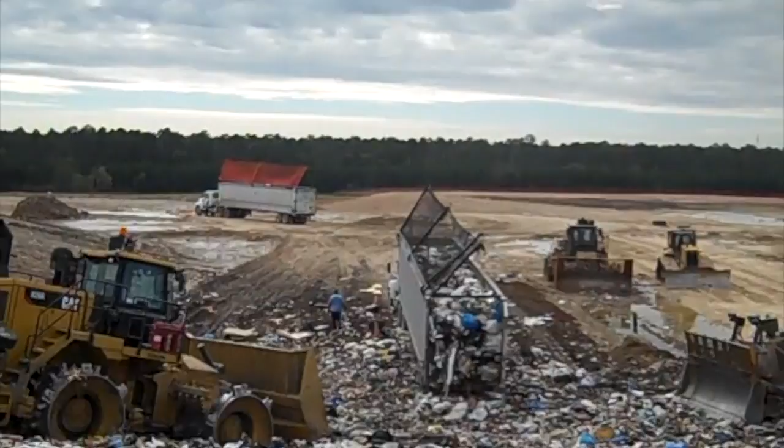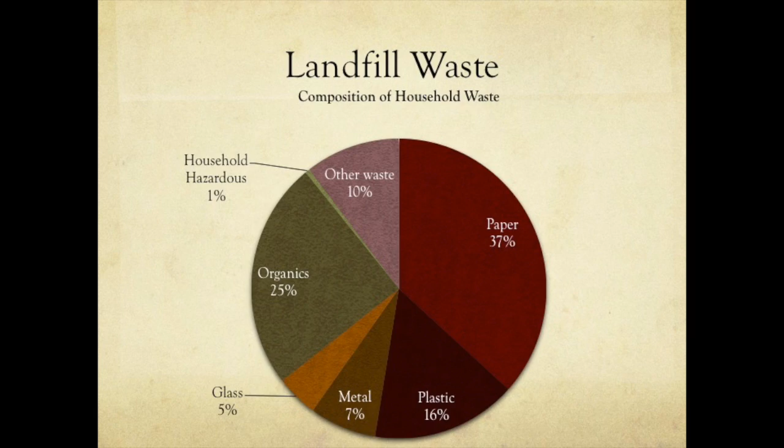A landfill is a place to dispose of waste material by burying it and covering it over with soil, especially as a method of filling in or extending usable land. Landfills typically consist of food waste, plastics, consumer goods, and packaging. Even though these items should be disposed of elsewhere, it is inevitable that electronics, appliances, yard waste, and even hazardous waste enter these municipal waste streams. These wastes emit pollutants, which require air pollution control.

Landfills are classified according to amount and types of waste received. Today, Florida has approximately 95 active Class 1, 2, and 3 landfills. Class 1 landfills receive an average of 20 tons or more of solid waste per day, and Class 2 landfills receive an average of less than 20 tons of solid waste per day. Class 1 and 2 landfills receive general, non-hazardous household, commercial, industrial, and agricultural waste.

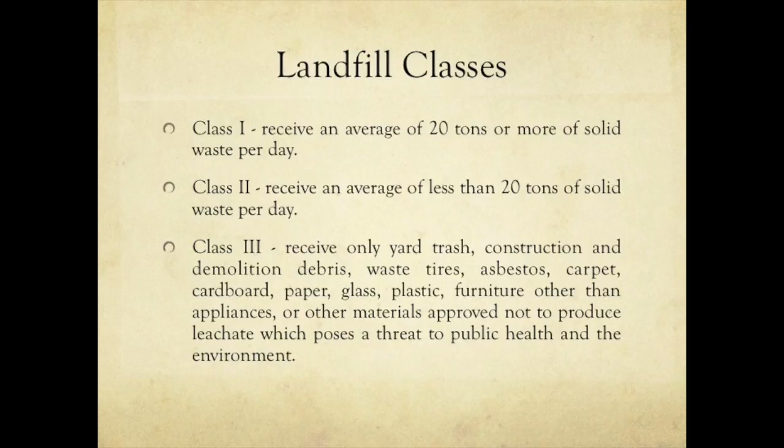Class 3 landfills are those which receive only yard trash, construction and demolition debris, waste tires, asbestos, carpet, cardboard, paper, glass, plastic, furniture other than appliances, or other materials approved not to produce leachate which poses a threat to public health and the environment. The municipal waste industry contributes to global greenhouse gases, as well as air pollutants that can cause direct harm to human health.

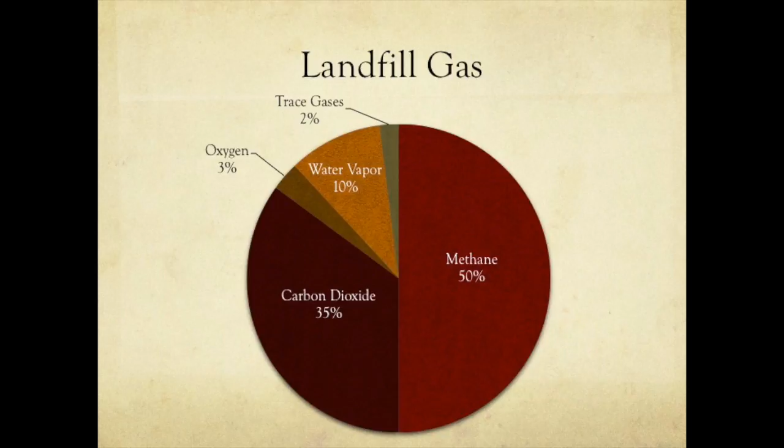A primary concern that must be addressed in the design and operation of modern sanitary landfills is the potential explosive nature of gases that are produced by decomposing solids during the landfill's life. Landfill gas is a product of solid waste decomposition by anaerobic digestion composed primarily of methane and carbon dioxide, both of which are greenhouse gases. Also present are oxygen, water vapor, and minute concentrations of trace gases such as nitrous oxide, hydrogen sulfide, carbon monoxide, VOCs, and non-methane organic compounds.

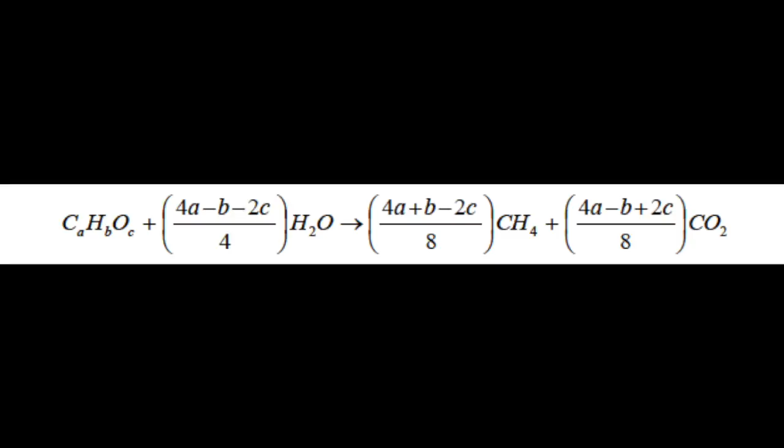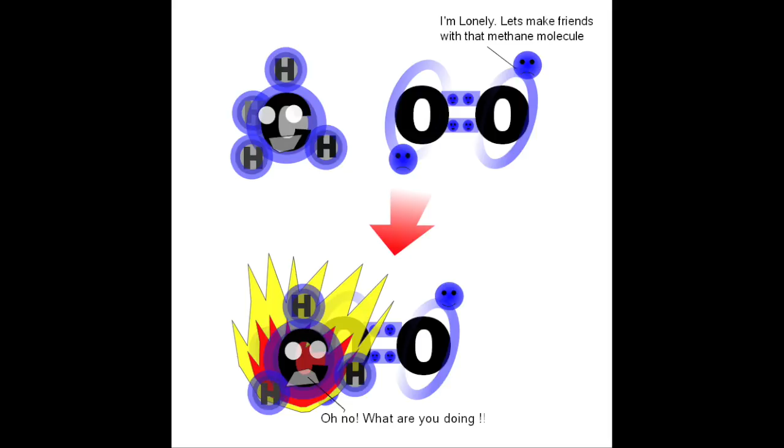The chemical formula for the anaerobic biological conversion of an organic solid waste to methane and carbon dioxide may be described as the decomposition of cellulose, resulting in a final composition of 50% methane and 50% carbon dioxide by volume. Methane is not harmful to human health, but when mixed with the appropriate amount of oxygen, it is flammable and can potentially be explosive, a characteristic many landfills take advantage of by converting landfill gas to energy.

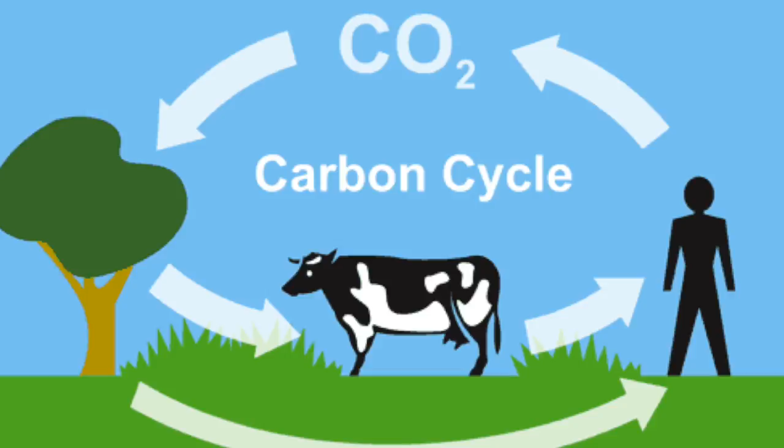Human lungs transform oxygen into carbon dioxide, which is exhaled and taken up by plants. Hydrogen sulfide at high concentrations may produce multiple health effects such as irritation to the eyes, throat, and lungs. Collecting landfill gas can improve air quality by reducing odors and emissions of pollutants such as non-methane organic compounds that can contribute to smog formation.

Our task was to assess the major air pollution problems generated from landfill gas, focusing on the means to mitigate their contributions toward global greenhouse gases, effects to human health, effects of non-renewable resources and energy costs, associated regulation, and landfill air pollution control methods of the best available and most effective technologies.

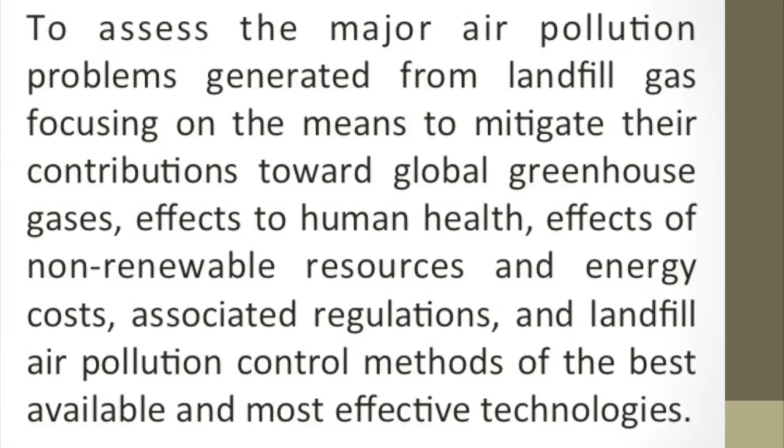Landfills and landfill gas energy projects can be subject to air quality, solid waste, and water quality regulations and permitting requirements. State and local governments typically develop their own regulations for carrying out the federal mandates. Therefore, specific requirements for construction and operating permits differ among states. It's important for project developers to review applicable requirements and regulations.

The Clean Air Act, CAA, regulates emissions of pollutants to protect the environment and public health. The CAA contains 5 provisions that may affect landfill gas energy projects. 1. New source performance standards and emission guidelines. 2. National emission standards for hazardous air pollutants, NESHAP. 3. New source review permitting. 4. Title V permitting. And 5. Information Collection Authority, which was used to implement the Greenhouse Gas Reporting Program.

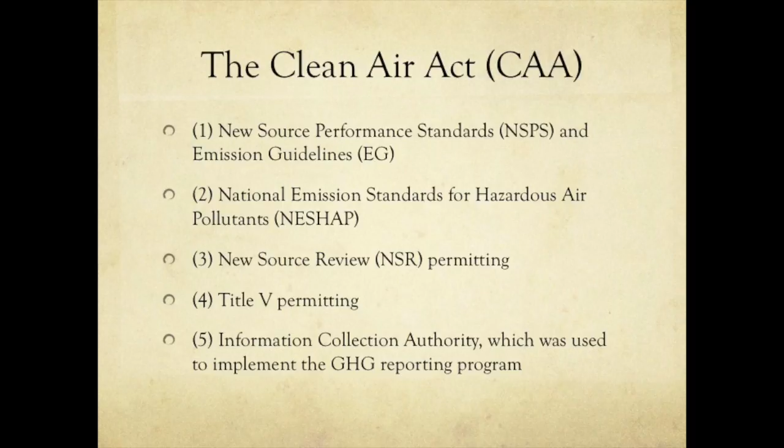Landfill gas energy projects can be part of a compliance strategy to meet EPA's landfill NESHAP. Under this rule, landfills meeting certain design capacity, age, and emissions criteria are required to collect landfill gas and to either flare it or use it for energy.

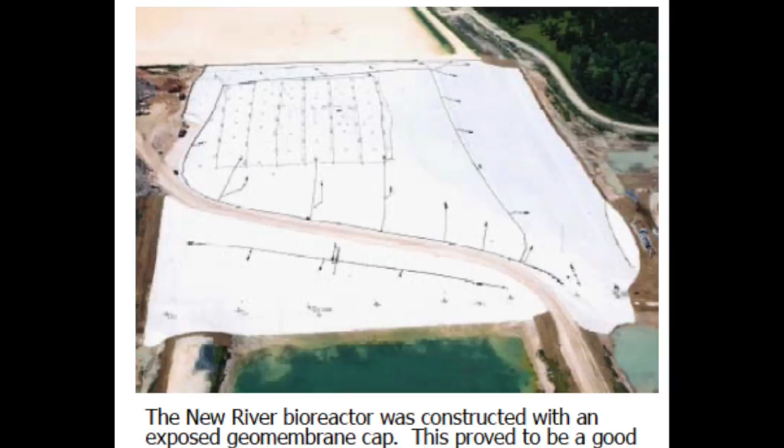The New River facility is a Subtitle D bioreactor landfill with Title V permitting. New River Regional Landfill collects waste from a 6-county region, including yours truly Alachua County, resulting in a combined 800 tons of waste per day, peak 1,200 tons per day on special days. Opened July 1st of '92. The 200-acre facility is divided into 6 cells. Each undergoes an anaerobic digestion cycle to collect the waste emissions.

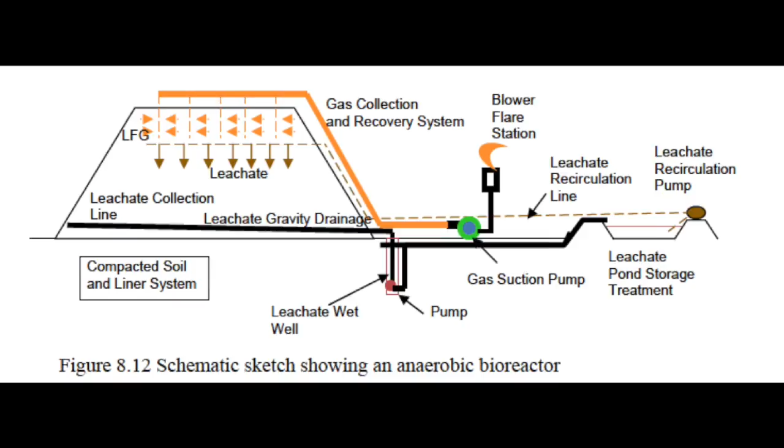First, waste is placed and covered with a double-layered liner and a foot of clay. So this is the clay, this is the cover soil. And this is what they use both to line the bottom of the landfill, and then they also use it as cover soil to prevent gas emissions. Yeah. You mold it, you compact it, and that's how you get your low hydraulic conductivity, or that low permeability. Over time, these emissions are pumped, collected, and analyzed by on-site instrumentation for relative composition.

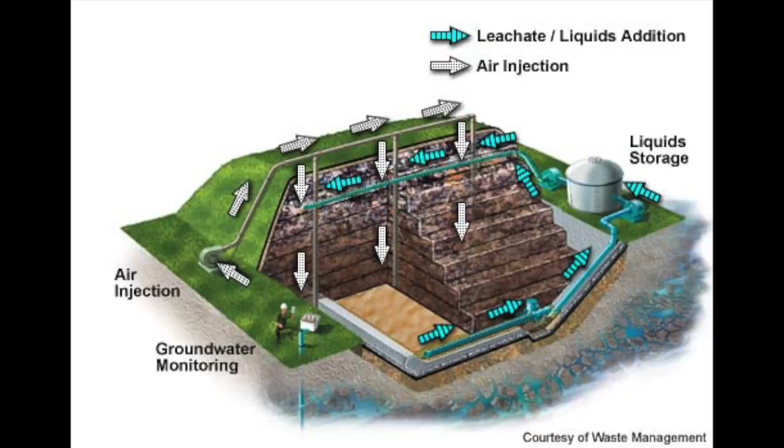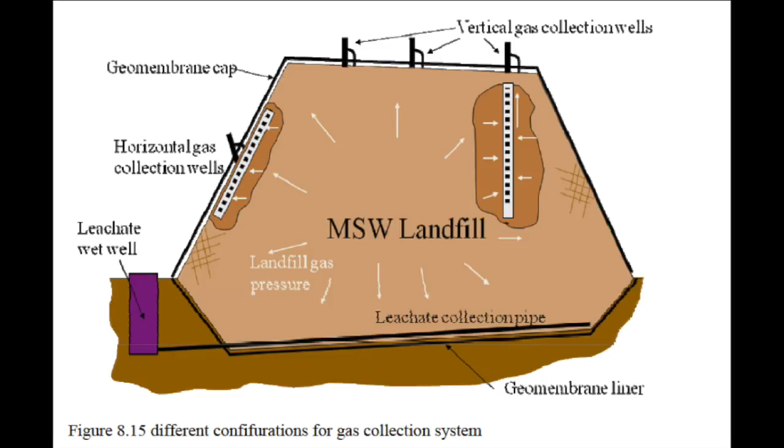A bioreactor landfill operates to rapidly transform and degrade municipal waste. The increase in waste degradation and stabilization is accomplished through the addition of liquid and air to enhance microbial processes. By efficiently designing and operating a landfill, the life of a landfill could be extended by as much as 20 years. Different techniques may be used to collect landfill gas. Possible options include use of horizontal collection systems, vertical wells, or surface trenches under the caps. Let me explain. Vertical wells are drilled either in clusters or as individual units.

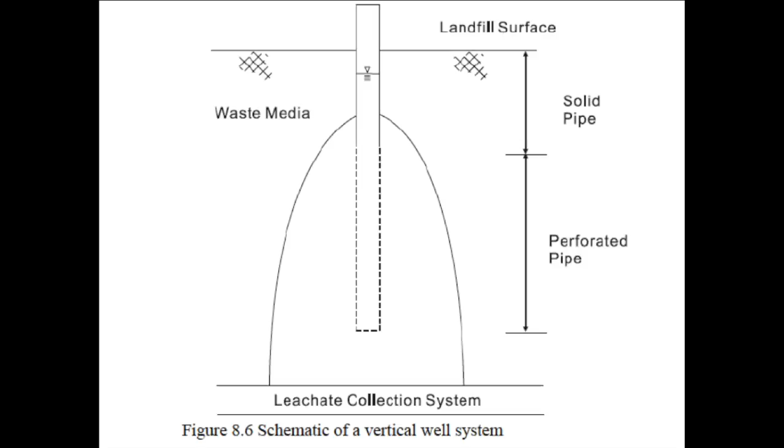In addition, well spacing is variable and is generally recommended based on an evaluation of the radius of well influence. The clustered wells are completed at varying depths to get top-to-bottom aeration. Horizontal trenches or vertical wells are connected by a manifold to a mechanical blower. The blower induces a vacuum in the manifold and in the wells or trenches, extracting gas from the landfill interior.

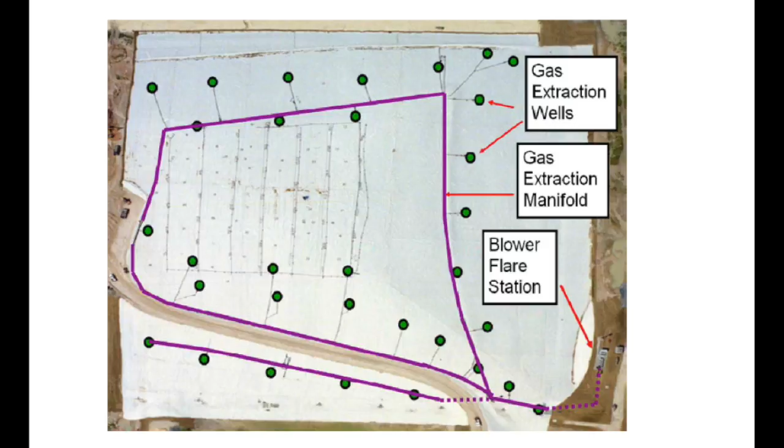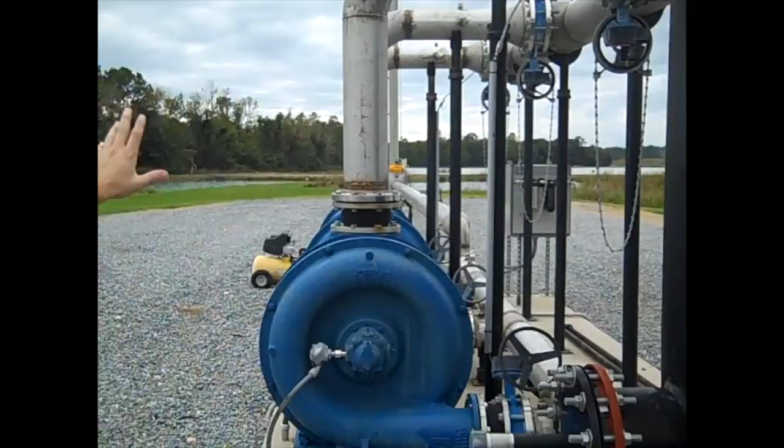All the while, the vacuum has to be maintained in such a way so as to not draw air into the landfill. So the two blowers that are operating are what is powering the vacuum system across the whole landfill. And so what we have are two blowers or two vacuum systems working in tandem, and then you have a backup. You always build a backup when you're balancing your well field, which is what we do on a pretty continuous basis out here.

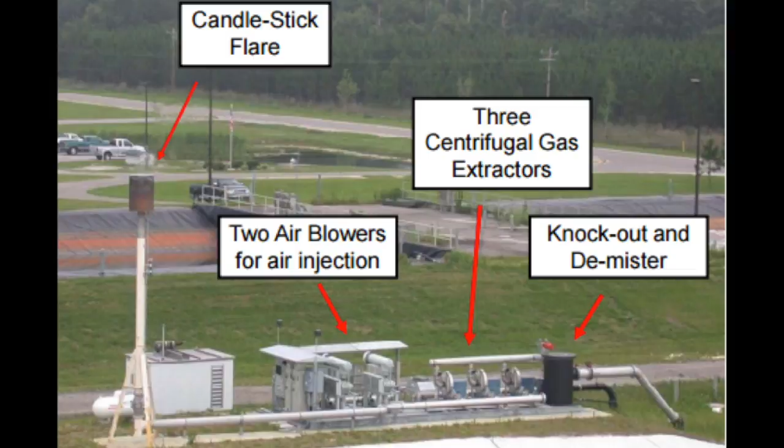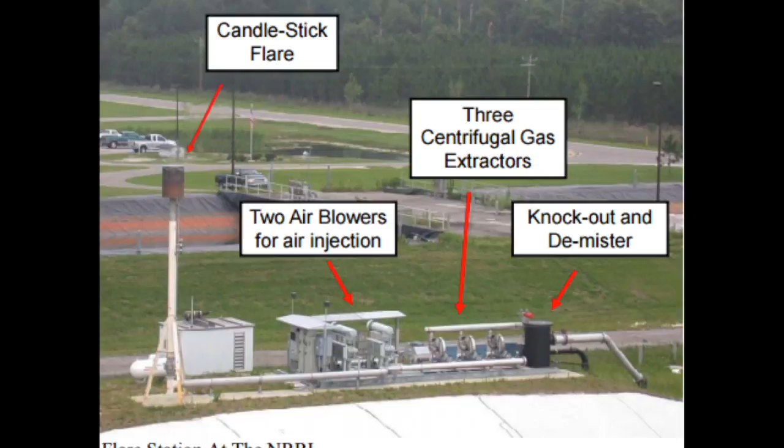So the harder you pull, the more chance you have of pulling in air. So you're introducing oxygen into your landfill, which is something that you don't want to do. Maintenance of the gas collection system is critical to capture quality gas in great quantity. Gas quality is an important measure of a fuel's performance and safety. Trace gas components are an important factor as well due to regulation.

For landfill gas emissions, peak concentration for stored waste climaxes at around 5 to 7 years. As a result, most air pollution control methods for Class 1 landfills are more subtle by nature and consequently not as intensive as other air pollution technologies found in other industrial services. Well, there are many different trace gases that are present in landfill gas, but they're at such small quantities that we typically don't deal with them on a daily basis. That's something that you check on an annual basis or maybe a semi-annual basis.

Typically, on a daily basis, when we're balancing our well fields, we're dealing with methane, carbon dioxide, oxygen, and then a balance, which would be both your water vapor and your nitrogen. So when we look at all these wells, we're looking at methane and carbon dioxide and oxygen.

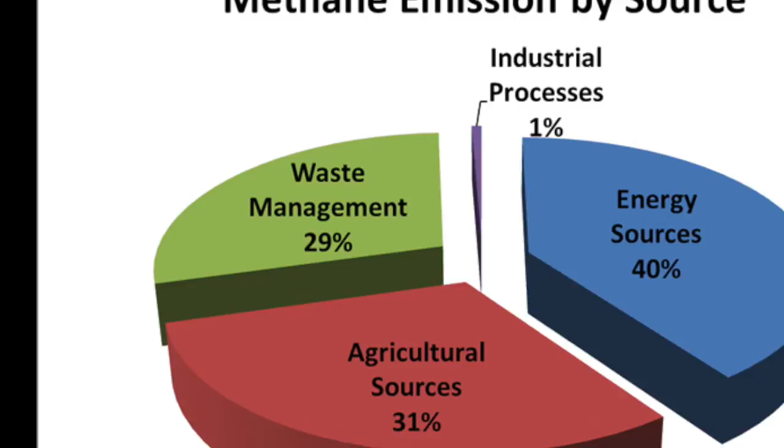Landfills affected by RCRA Subtitle D are required to control gas by establishing a program to periodically check for methane emissions and prevent off-site migration. We have 27 groundwater monitoring wells and 28 gas monitoring wells to make sure methane isn't moving off-site. Currently, the gas is burned into the atmosphere by this flare tower. The barely visible flame is indicative of how fuel lean the emissions are.

The flare has 3 blowers to it. We use 2 at any given time, but we're able to set the flow rate of the vacuum system either by a flow rate or by a pressure. Typically, the flare operates at anywhere from 1500 or 1600 SCFM, standard cubic feet per minute. So that's what it's pulling out of the landfill at any given moment in time. But we can go up to about 1800.

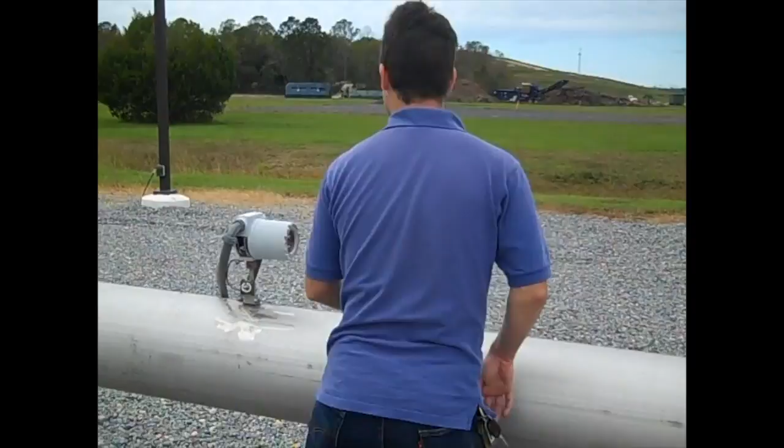I think I've seen it at the complete maximum around 1850, 1900. Okay. But we don't like to operate it like that. We don't just recklessly jack up the SCFMs to as high as they can go. There's a balance that we find. At this site, it's about 1,600. Seems to be where we can cruise pretty well. And so this is telling us right now that we're reading about 1,200 SCFM. What's the concentration of oxygen in the air?

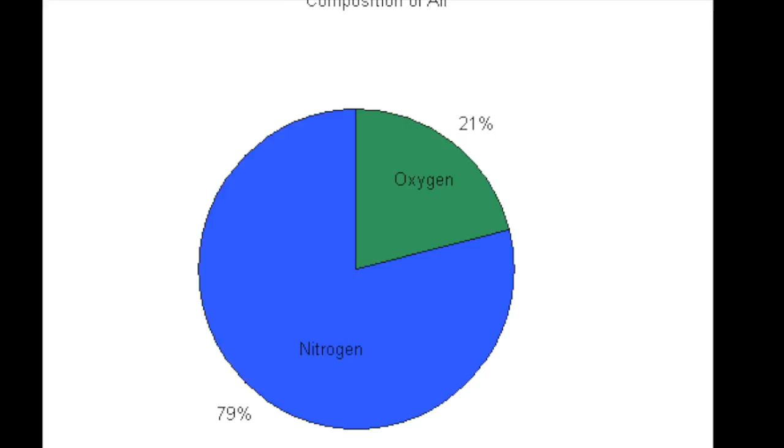21. Given an ambient air concentration, 79% nitrogen, 21% oxygen, resulting exit gas concentrations for an ideal bioreactor landfill would be 79% nitrogen and 21% carbon dioxide. This assumes all oxygen is utilized for waste degradation. However, in an actual aerobic bioreactor setting, conditions include both anaerobic and aerobic processes, thus methane formation as well as carbon dioxide formation results. And what you look for is 50% methane, about 45% CO2, and then less than 1% oxygen and some water vapor and probably your nitrogen gases.

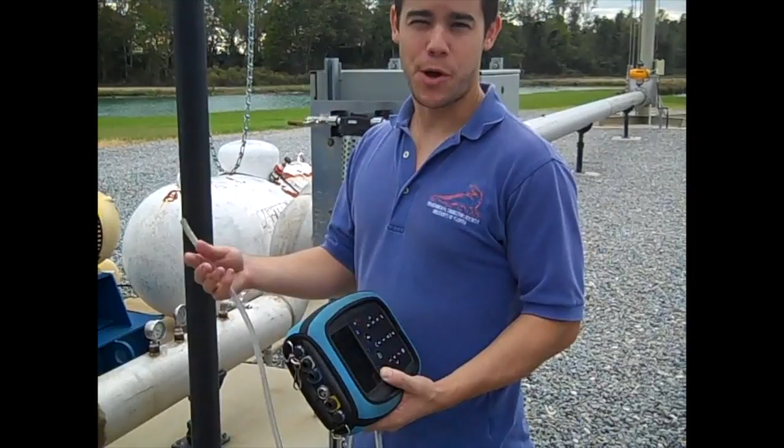As the flow rates change, we go around and rebalance the well field, and so that's what the gas extraction monitor, the GEM as we call it, is for: to make sure that all the wells look good, because if all the wells are at 50%, then we know our flare is getting 50%. This is a gas extraction monitor. We call it a GEM. So what we'll do is we'll take a sample of gas right out of here and check the quality.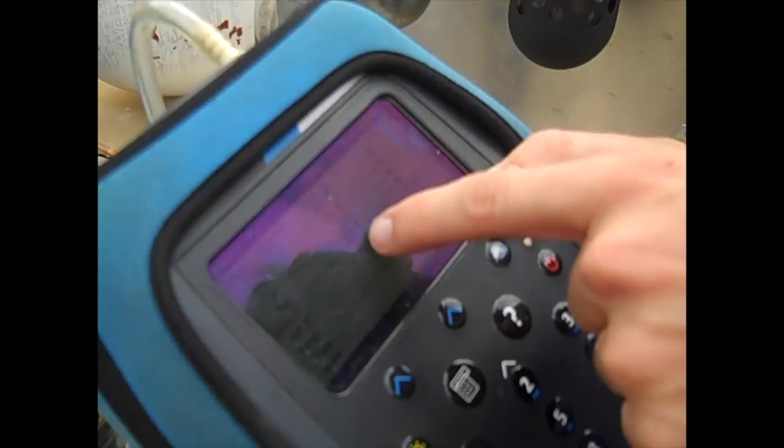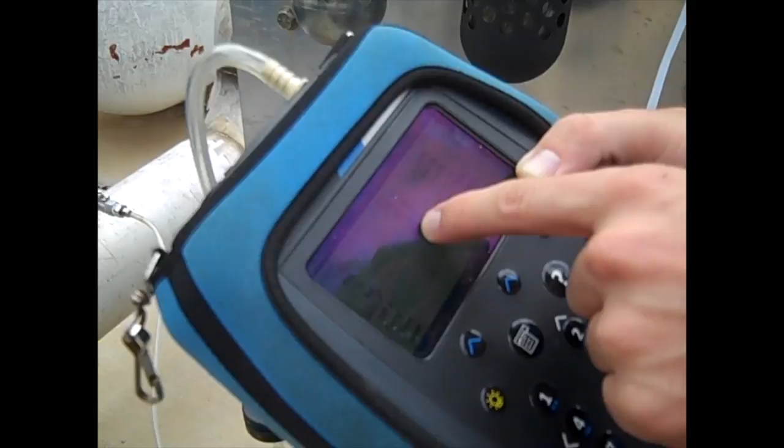So we're seeing a little high on the water vapor in the balance, but we're getting 50% methane, 35% CO2. As long as we're less than 5% oxygen, we're okay. We like to see it below 2%, so it's a little higher than we'd like. We could let it run for a little bit longer and see if that changes it. But overall, we'd call that pretty good methane, pretty good landfill gas.

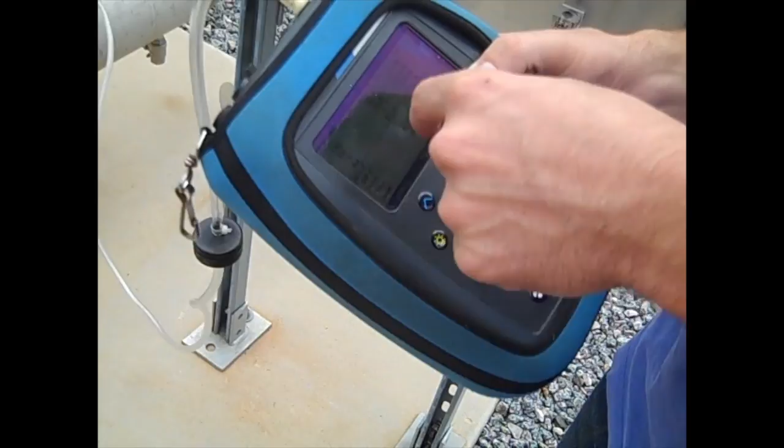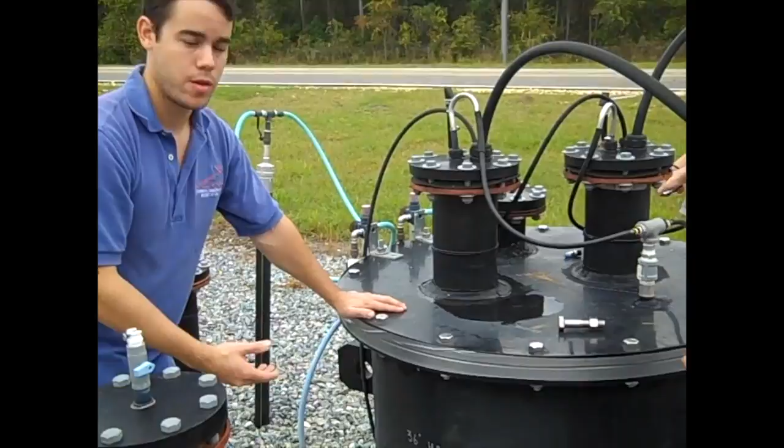But the gas comes into here. The landfill gas is wet gas. There's water vapor in it. It flows from the sump into here.

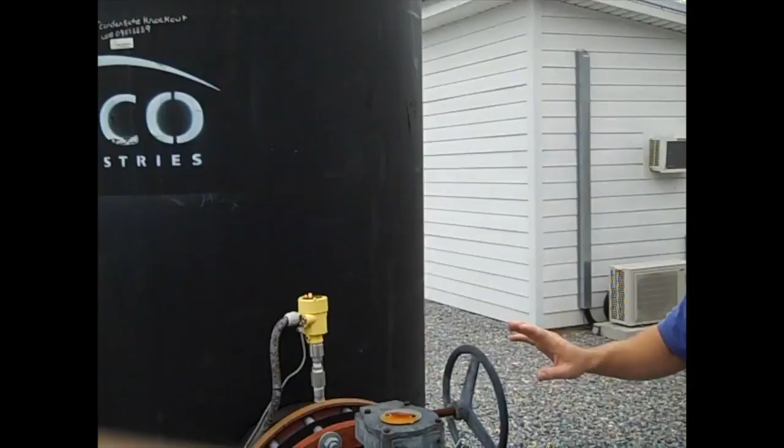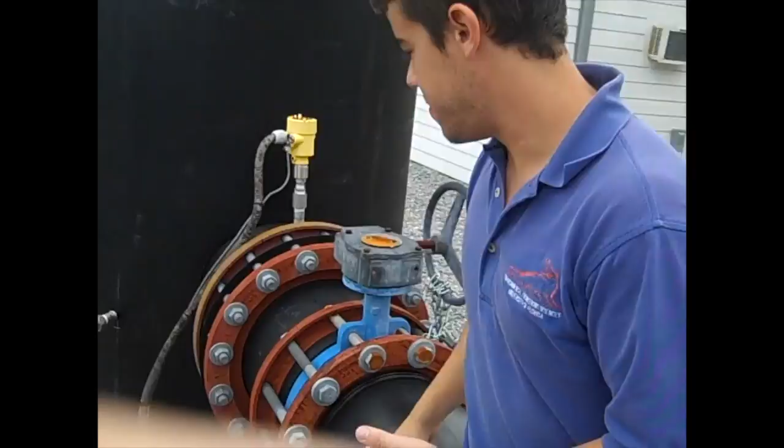This is called a condensate knockout. Now we have baffles in here that create a surface that allows for that water vapor to hit the surface, condense, become a liquid, and then it drains out back into the bottom of the sump, and then we use pneumatic pumps to pump the condensate out, and that goes to treatment with the leachate.

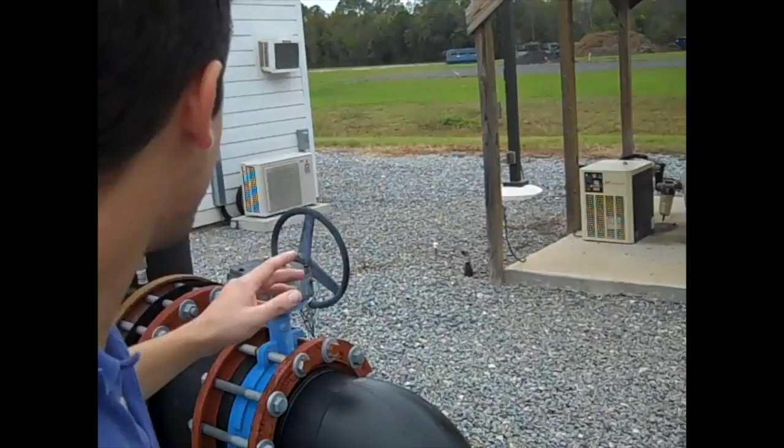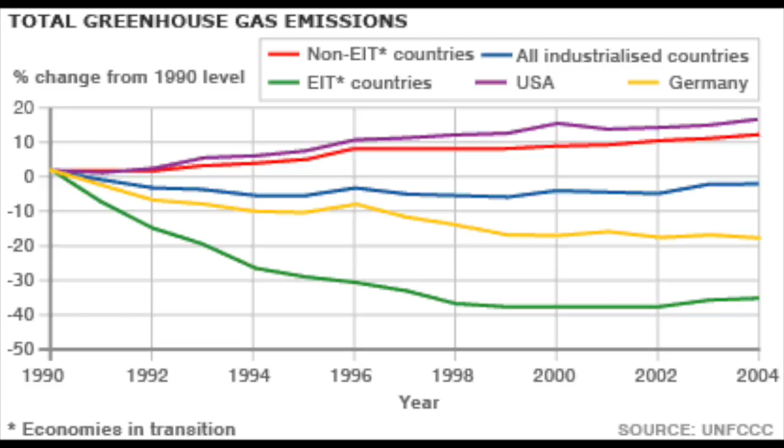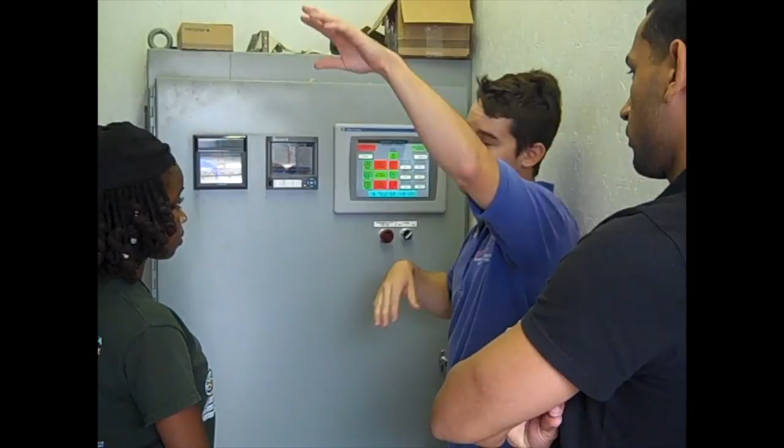Landfills and owners of stationary combustion equipment that burns landfill gas may be required to report greenhouse gas emissions under 40 Code of Federal Regulations, CFR, Part 98. So this is all the electrical equipment. We have both a hard copy readout of the gas flow and the temperature of the flare, and then the digital. So the engineers at Jones Edmunds who take care of this site see this in real time at all times, and then our guys out here see this in real time at all times. But then for DEP, we're required to maintain hard copies, and so the hard copy is kept in a safe place.

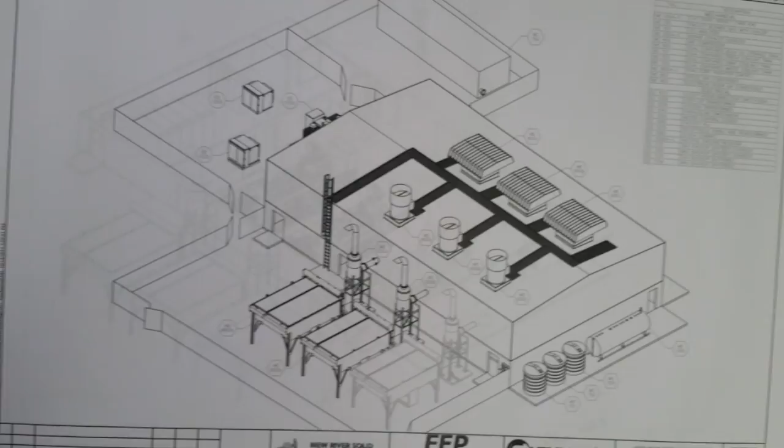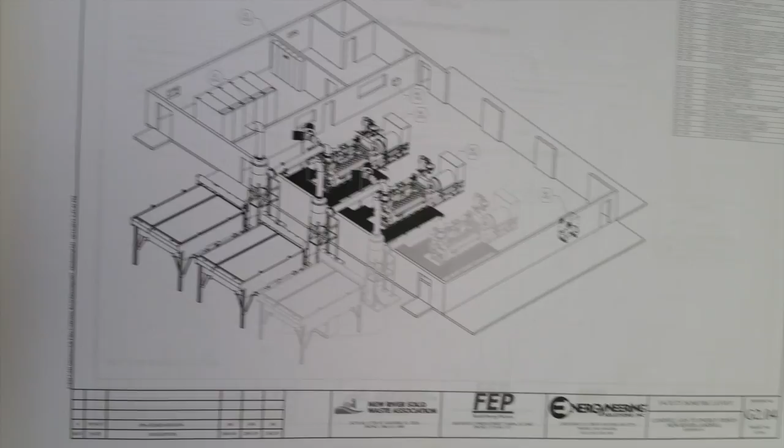The New River Regional Landfill has the monetary capital and designs in place currently to facilitate its own waste-to-energy facility. Here are the design specs for the facility. The new waste-to-energy facility will premiere 2 generators with space in place for a third when operations expand. New River claims this energy generation will bring the facility great profits. The waste-to-energy facility and flare tower do not have to purify landfill emissions, which already contain 50% methane. Hypothetically, if the facility decided to sell its fuel commercially, the effluent would need to be stripped of water vapor and carbon dioxide to produce a 98% pure methane stream.

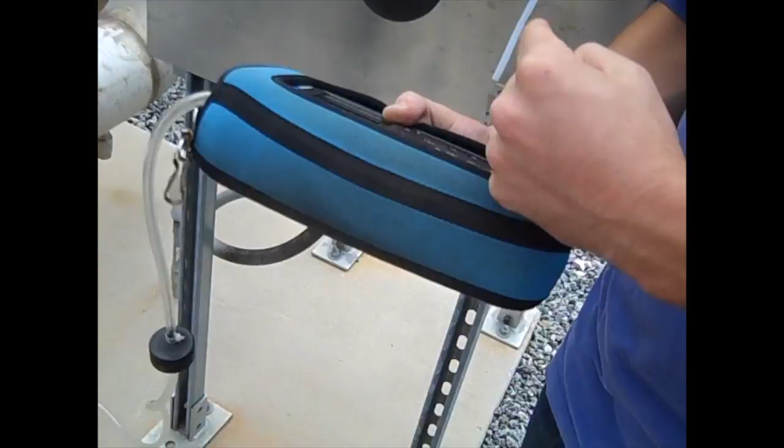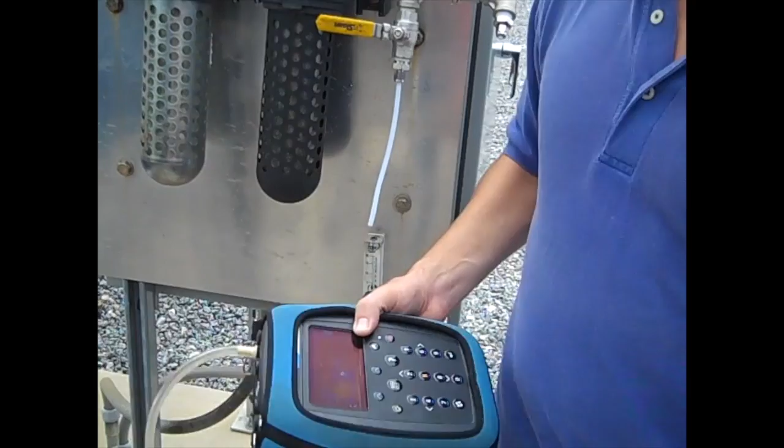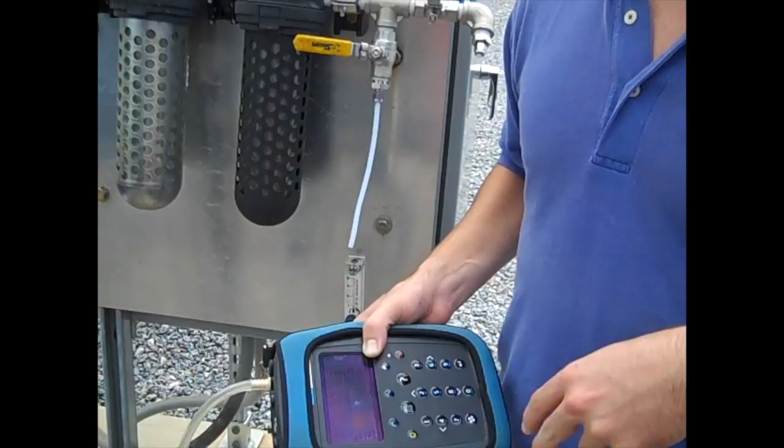It's only 50% methane, so if you're going to put this into a natural gas pipeline, you have to strip all the CO2, all the water vapor off of it. You have to make it something that's 98% methane. There's hydrogen sulfide in there too, so you remove that. If you're just burning it to create energy on site using a generator, you don't necessarily need to do that. You could just burn it as a landfill gas. And there are generators that can do that. And so it totally depends on your application, what you're doing.

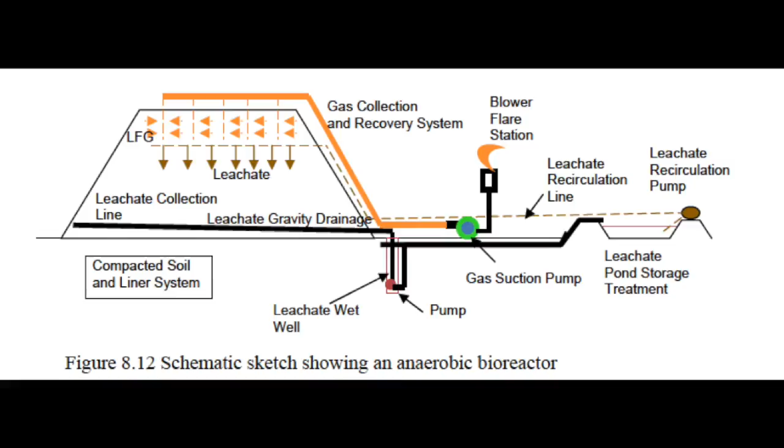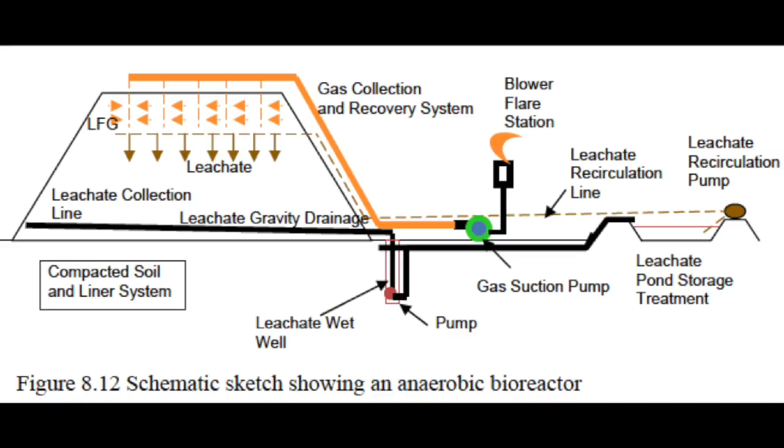Gas recovery and subsequent use play an important role in reducing the total cost of anaerobic bioreactor landfills. The estimated capital required for a 40-acre collection system designed for 600 cubic feet per minute of landfill gas is approximately $1,022,000, or $25,550 per acre, assuming one well is installed per acre. Typical annual operation and maintenance costs for collection systems are estimated to be $180,000 or $4,500 per acre.

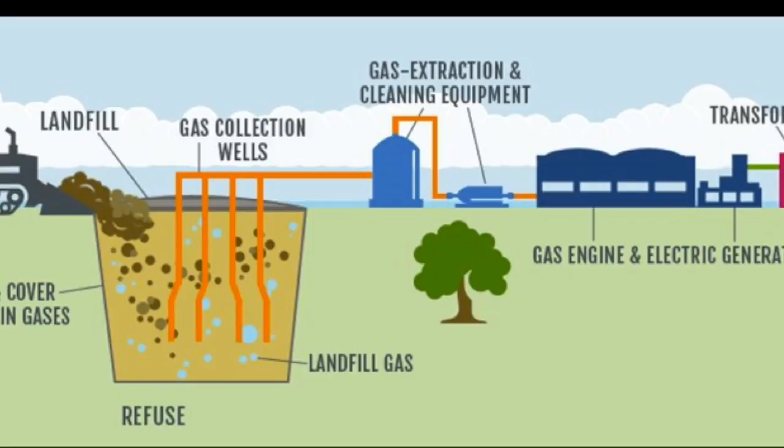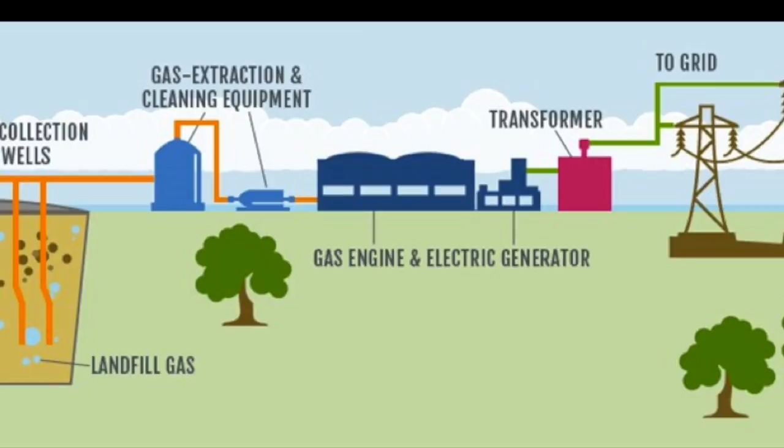If a landfill gas energy project generates electricity, often a landfill will use a portion of the electricity generated to operate the system and sell the rest to the grid to offset these operational costs. Flaring costs have been incorporated into these estimated capital and operating costs of landfill gas collection systems because excess gas may need to be flared at any time, even if an energy generation system is installed.

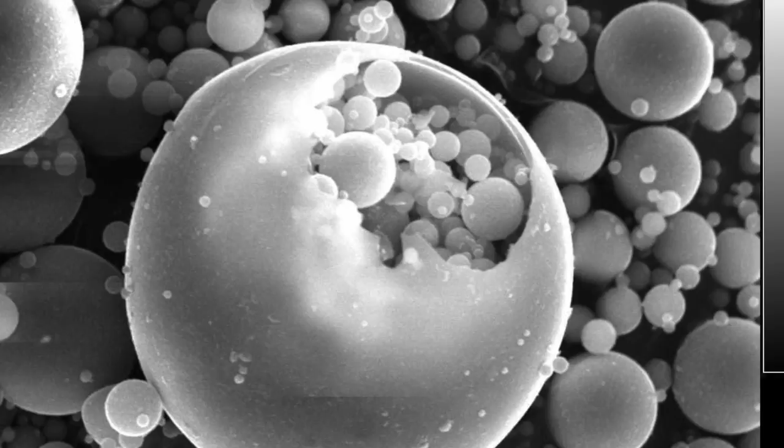Increased gas creation is the motive for the collection of the landfill emissions as a fuel source, since it's carbon-rich. Injecting lime slurry as well as the fly ash act as a pollution measure to control methane formation, inhibiting gas formation outright through methanogenesis. Technologies exist for observing and recording emissions data. Lysimeters are one example, for measuring the evapotranspiration of waste and consequently its moisture content.

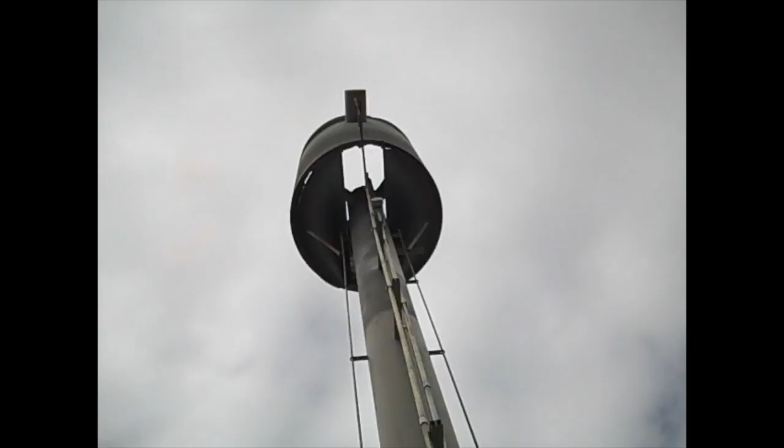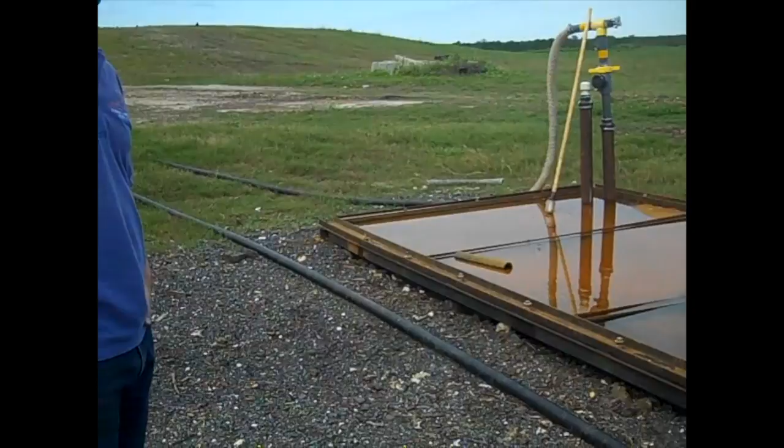It's a hell of a thing to smell once you take the lid off. Oh, I can only imagine. If you were to try to describe it, what does it smell like? Stinky. Like burnt diapers? No. It's, if you can imagine, garbage that's several weeks old. Sour milk. Oh, it's like sour milk, huh? Oh, dear. Have you ever been to Balls? Yes. Oh, it smells like balls. It smells like cheap beer and sweat. I see. Really, it smells like sour milk is the best way to describe it. That was rich.

No. So, see over there in the corners? Yeah. There's a couple fires. Okay. Make sure that your gas collection system and your flare is operating effectively.